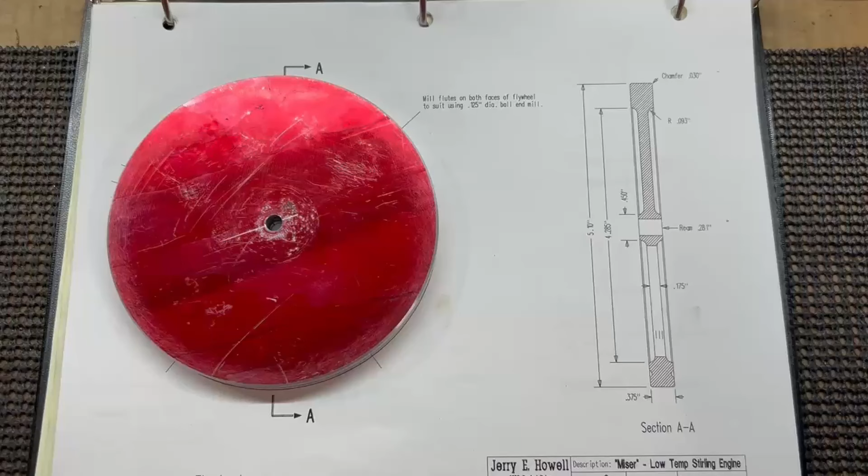So last time we introduced a new engine that we're building, the Howell Miser low temp Stirling engine. So we got started, looked at the plans and looked at some material, and then got some material cut out. So the first thing we're going to do is start on this flywheel blank here that we've got cut out.

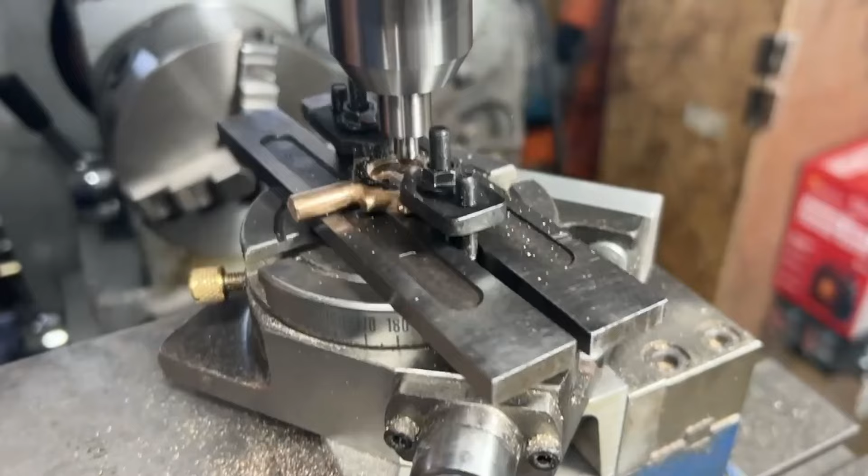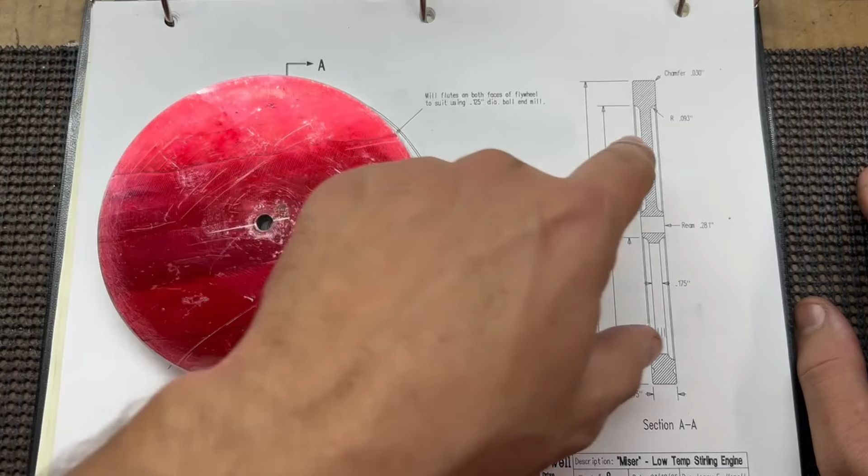So to get started on this, the first thing I'm going to do is relieve this center section here that gets thinned out from the sides to 175 here in the middle. And then there is a radius here on the side. But in order to start working this material out, I am going to put it in the chuck on the lathe and we're going to trepan it, use the trepanning tool, and then get some of this material worked out from both sides.

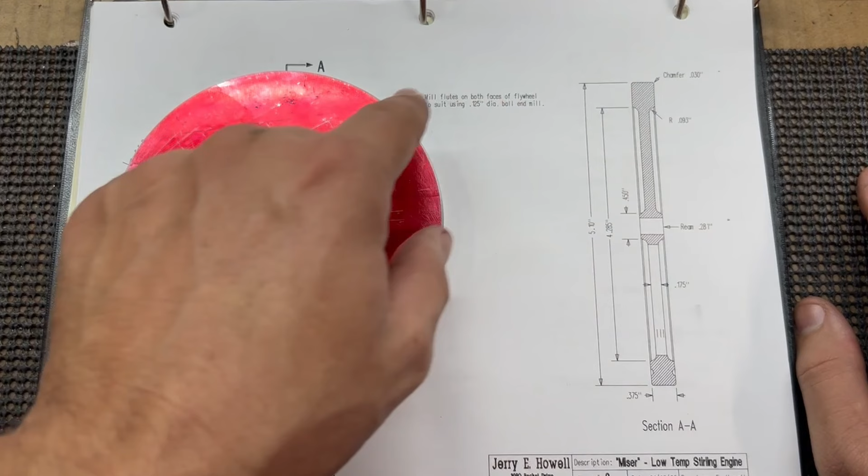And then we're going to leave this corner here sharp, and then we're going to come back with a form tool, just a high-speed steel tool bit, and we'll get this radius ground on it, and then we'll cut this radius here after we get this material moved out. So let's get it mounted up in the lathe and get started.

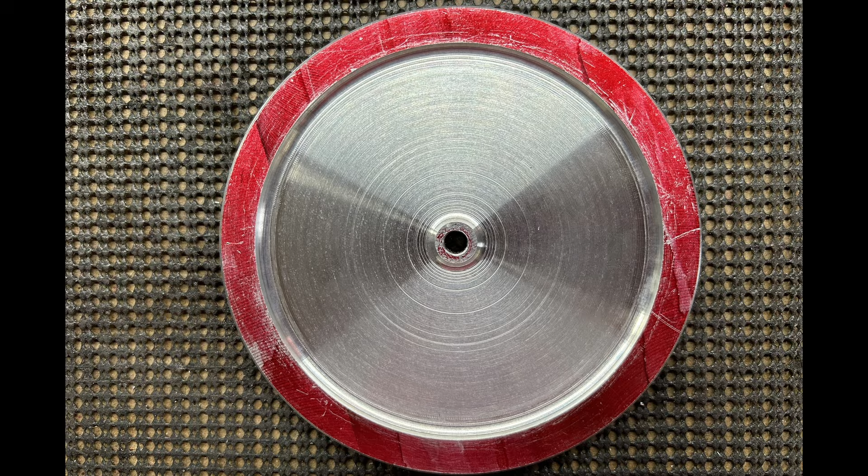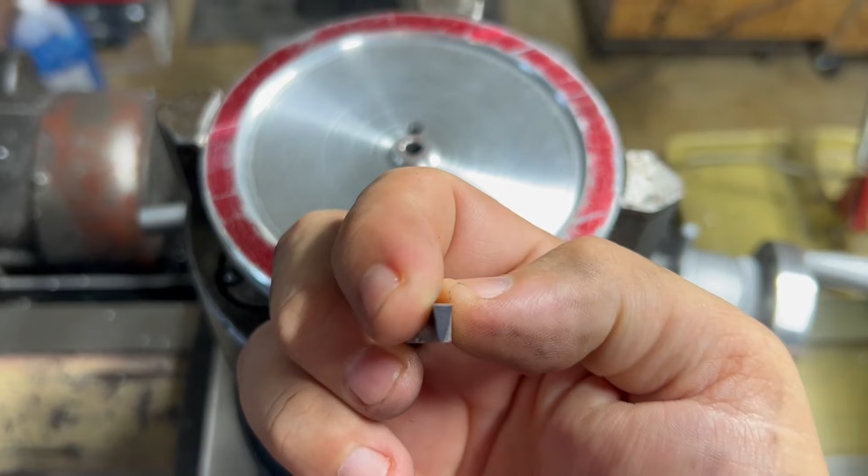Okay, we're set up over here on the mill now. I got the flywheel cut out, so I used the trepanning tool. I've talked about it before, but in case you don't know what that is, it's basically a cutoff tool that has a radius on the end. So we were able to plunge in here and work all this material out a little bit at a time, and then take a cleanup pass.

And then there's a radius cut here and a radius cut here on the inside. And I was able to just use a forming tool with a radius on it to come in here and cut these radiuses. So we're ready to start cutting the triangle sections out now. So we'll be left with 5 spokes.

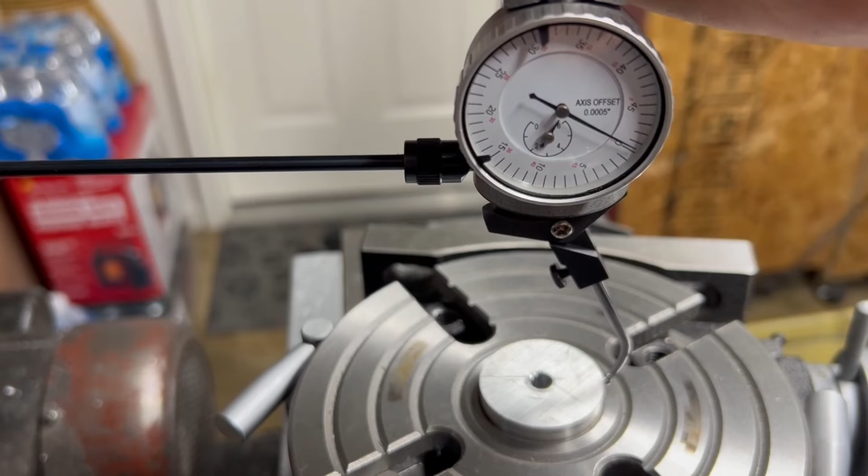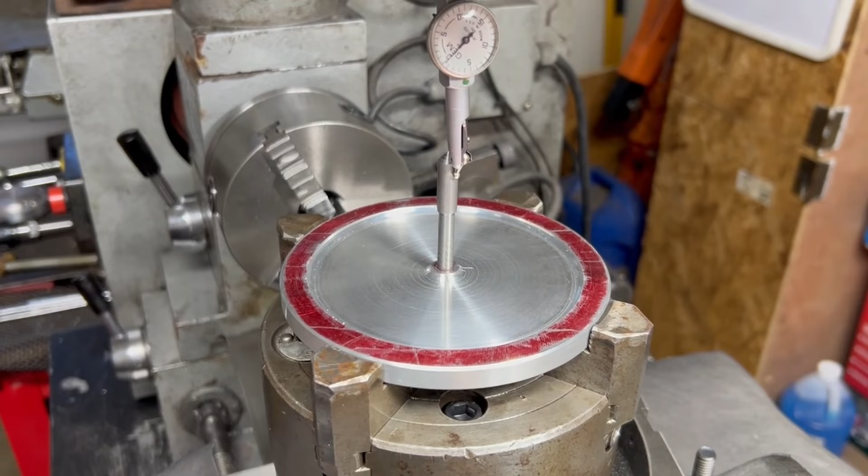So we're set up on the rotary table, and I put my 4-jaw chuck on here. I don't have a 3-jaw chuck that's big enough to fit on this rotary table. It's only a 4-jaw. So we centered up the rotary table. Then I put a pin in here, and then we centered up the flywheel.

So I've got all of my coordinates marked out to cut the first 5 holes, and then my coordinates to cut the next 10 holes on the outer, and what the radius is. So we'll get those holes cut, and then machine slots out here, and then to machine these straight sections, we will have to move the table and offset this. Then we'll machine out the straight sections, and that'll take out the triangle there.

And then on this outer edge, we'll take a ball end mill, and it gets 5 grooves machined in it. And I've got the coordinates laid out for that. And then once we get all that done, we'll flip it over and machine the same grooves on the other side. So I've made a test cut already, just using a 1/4-inch 2 flute end mill to plunge through this.

So we'll get all these holes done first, and then my plan is to cut out this section here. This is a 1/4 inch, and to cut this section out here with a 3/16 end mill, and then come back and do a cleanup pass with the 1/4 inch and see if that does a little better job. So we'll get to it.

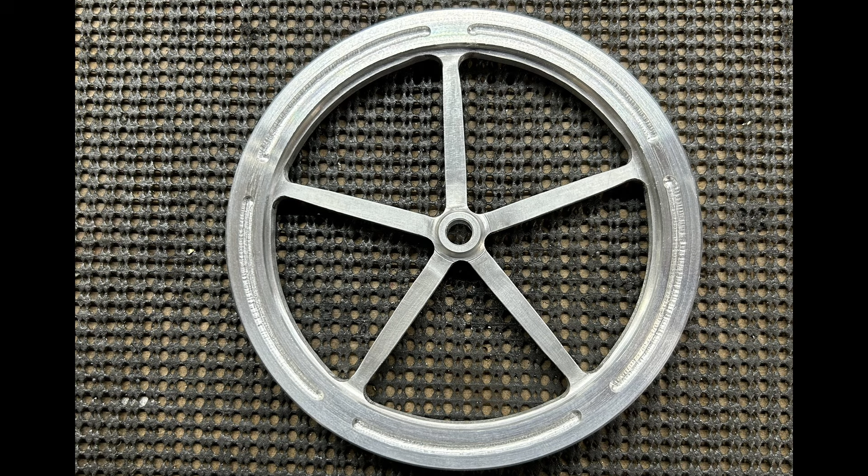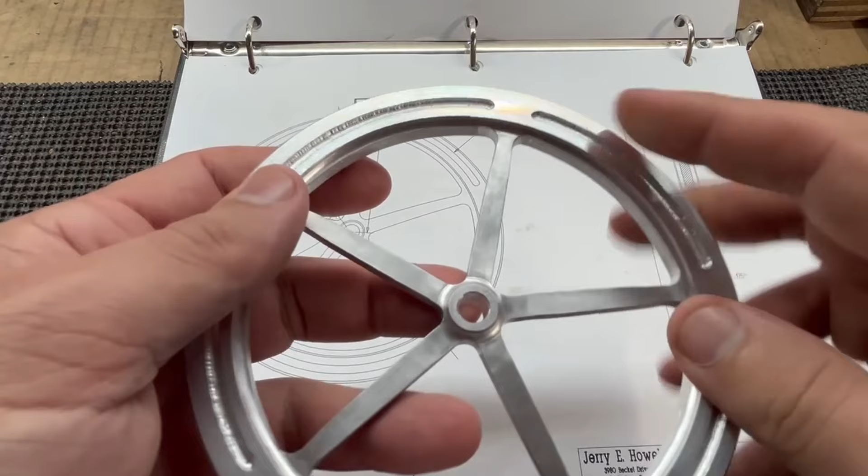Okay, so that finishes up the machining on the flywheel. So you saw me come in here with a 3/16 end mill, and then I cut this slot on all 5 sections. Then we took an 1/8" ball end mill and cut these grooves here. Then to cut this here, you have to offset the table. So I had to move my table in this direction.

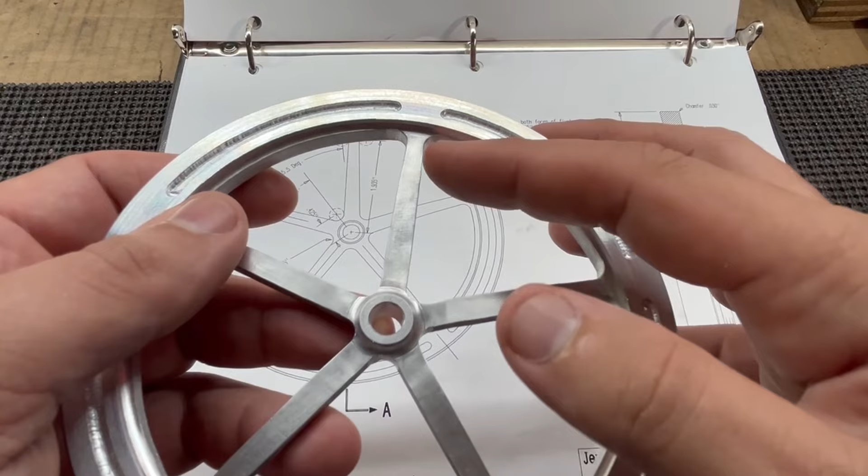And then I had to get the angle right on this, because this from top to bottom total has a 2-degree angle, so 1 degree on each side. So where your normal angle would be, you've got to go 1 degree more and then get the right offset. So then I cut out these 5 slots here. Then we reversed the table to the other offset on the other side, and then cut these slots out here. So that took out the whole center section, then centered everything back up again.

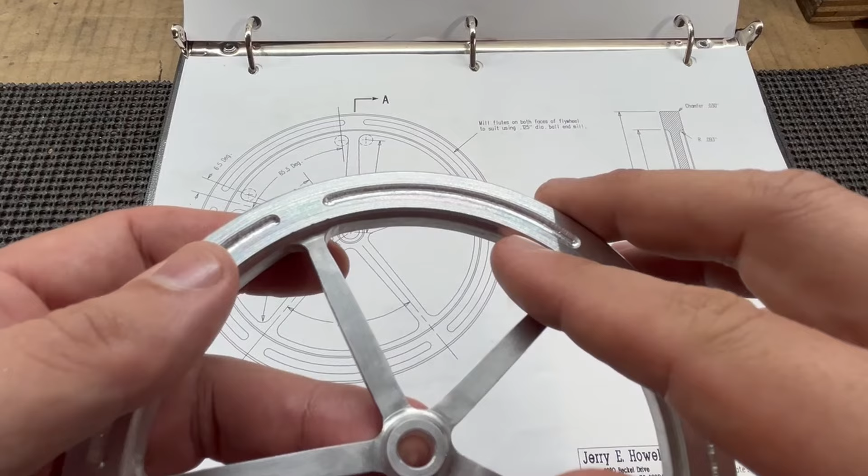And then where I had cut this with the 3/16 end mill, I came back in and cleaned it up with a 1/4" end mill. I probably should have done that on both of these also, but I did cut them with a 1/4. I cut them just a little bit shallow, and then I actually cleaned it up a little bit with the die filer to blend these straight edges into this radius.

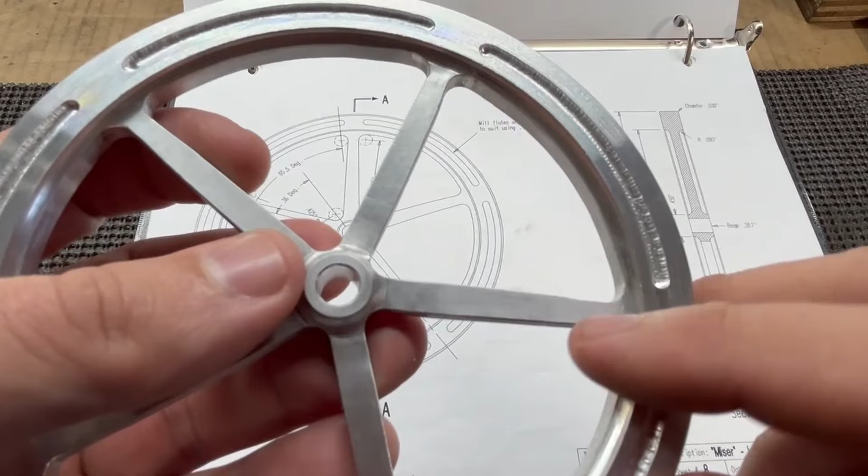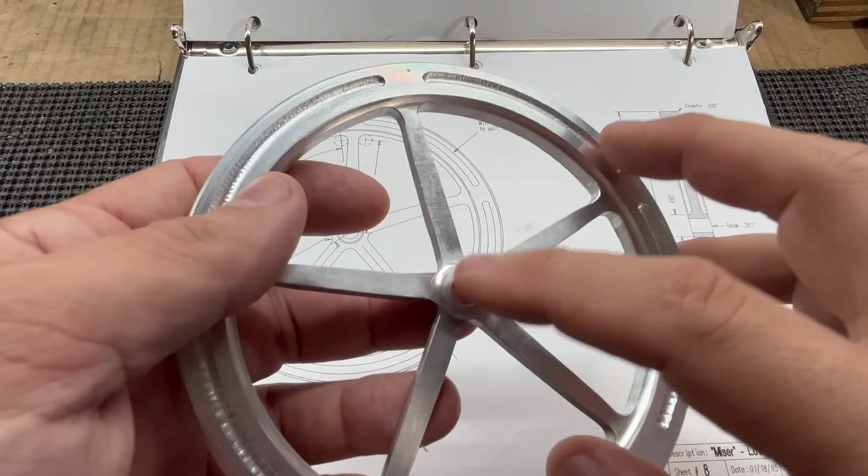So after we machined all that out, I flipped it over, got it lined back up, and then took an 1/8" ball end mill and machined these slots on this side. Then I put it back in the lathe in the drill chuck, and this was a 1/4 inch, but it's supposed to be 9/32. So we drilled and reamed that out to 9/32, and then I made a couple thou pass on these edges here to clean this up. So it turned out good. Everything looks good, matches the print.

So that's going to do it for the flywheel, and that's going to do it for this episode. We'll come back next time, and we'll hopefully have the screws for the displacer plate, so I can go ahead and get the holes drilled in that, and then we can continue working on that.